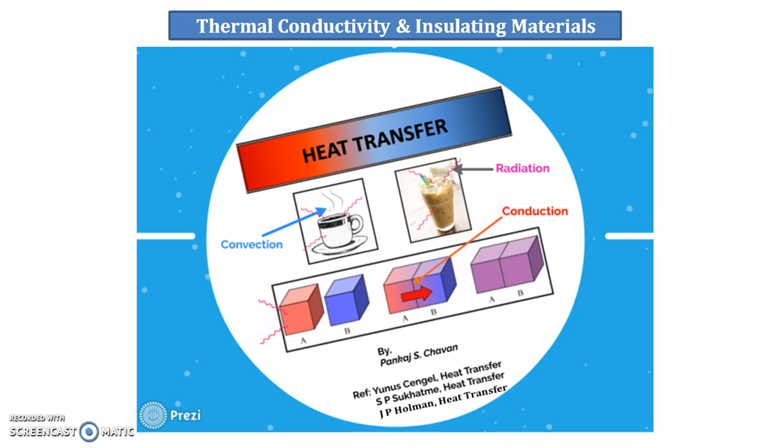Hello everyone. In this video, we will learn about different aspects of thermal conductivity and the different insulating materials.

In one of the previous videos, we discussed the different laws of heat transfer, and when we learned about the law of conduction, which is known as Fourier's law of heat conduction, we defined one property which is known as thermal conductivity. So thermal conductivity tells you about the ability of a material to transfer heat. It means that it tells you whether the material is able to transfer heat quickly or not.

And from Fourier's law of heat conduction, we came up with this equation, and the same equation can be rearranged so that we can get the value of thermal conductivity from it. On the basis of this definition or equation, experimental measurements can be made to determine the thermal conductivity of different materials.

We know that different materials store heat differently, and we have defined the property specific heat, denoted by Cp, as a measure of a material's ability to store thermal energy. For example, at room temperature, the value of Cp for water is 4.18 and for iron it is 0.45. It shows that water can store almost 10 times the energy of iron. As water has a high Cp value, it has a high capability to store thermal energy compared to iron. In the same way, the thermal conductivity K of water and iron can also be compared.

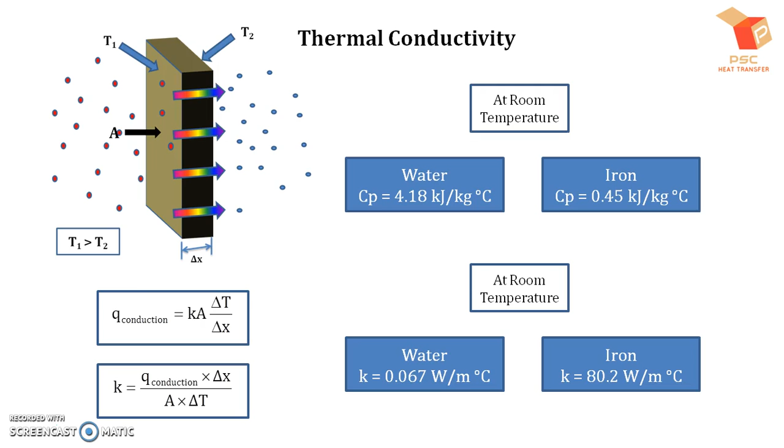Now this figure shows the varying ranges of thermal conductivity. For different substances like solids, liquids and gases, the thermal conductivity values and their ranges are provided. From this figure it is clear that this is the portion in which we have solids, and solids have higher thermal conductivity values, whereas gases have lower thermal conductivity values, and liquids have thermal conductivity values in between gases and solids.

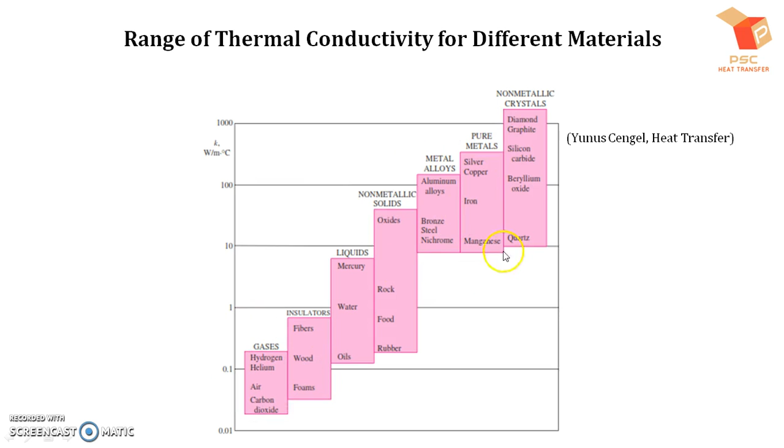Now we will explore the aspect of thermal conductivity related to solids, liquids and gases. So let us start with gases. We know that the molecules of gases are in continuous random motion, and as they move, they collide with one another and exchange energy with each other. So you can see here that the molecules are in continuous motion, and when they move, they strike each other so that the kinetic energy of one molecule is transferred to another molecule.

Now let us say I am heating this set of molecules here. What I have shown is the same set of molecules, the only difference is this is the set of molecules before heating and this is the set of molecules after heating. So when we heat this, the flame of the heat source has higher kinetic energy molecules.

These higher kinetic energy molecules strike the molecules of gas here and impart their kinetic energy to them, so these molecules' kinetic energy increases. This is because of collision, and this increase in kinetic energy is again transferred through the entire medium with their collisions.

Now here we can see that when we provide heat, the molecules move with higher average kinetic energies. It means that as the temperature of these molecules increases, the average kinetic energy increases, and the molecules move with higher kinetic energies, so that when they collide with each other, the transfer of kinetic energy will be more. Now let us say we have here two sets of molecules.

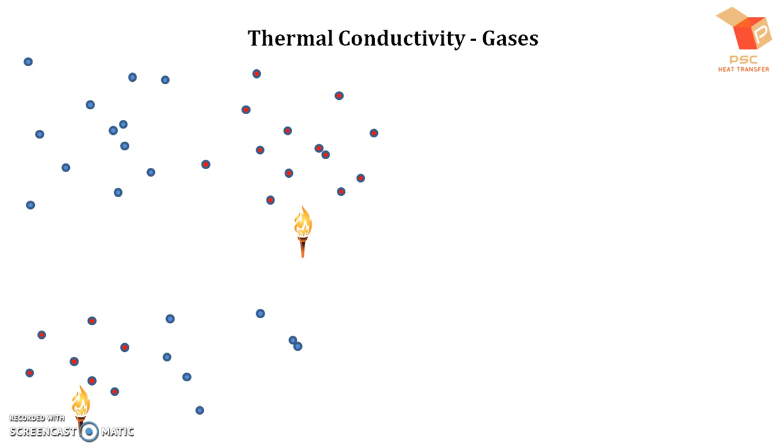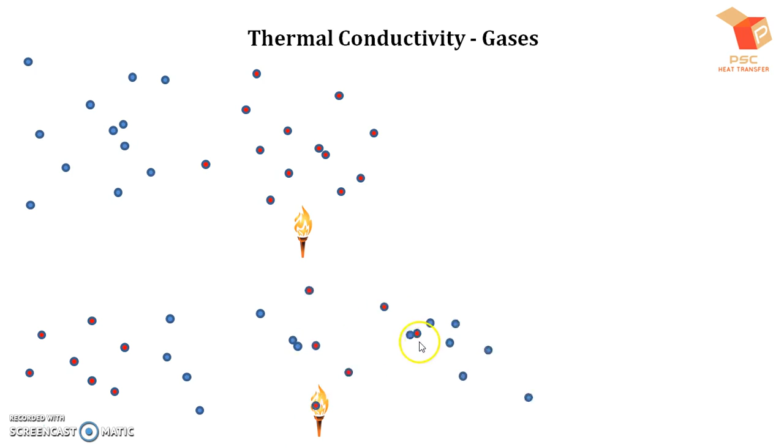Now in the same manner, I'm showing here the same sets, set 1 and set 2. Set 1 is now heated and its temperature increased, because of which the molecules are moving with higher kinetic energies, and hence the higher kinetic energy molecules will enter into the second set and transfer the energy.

From this we can conclude that as heat is given, the temperature will increase, and with increase in temperature, the average kinetic energies of the molecules will increase. As they have more kinetic energy, the molecules of higher kinetic energy will collide with the molecules of lower kinetic energy, and because of this collision, the amount of energy transferred will be higher, because the molecule from the higher temperature region now has higher kinetic energy.

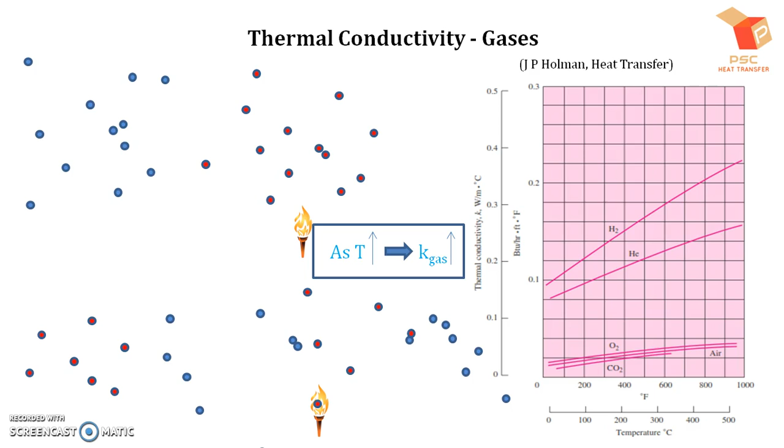And the same thing is shown here in the graph. Here we have different gases like hydrogen, helium, oxygen, carbon dioxide, air, and all the gases show the same behavior. On the y-axis we have thermal conductivity. As temperature is increased, the thermal conductivity is continuously increasing. So we can conclude that as temperature increases, thermal conductivity of gases also increases, because as temperature increases, the collisions increase, and the heat gets transferred quickly.

Now let us move on to thermal conductivity of liquids. The physical mechanism of thermal energy conduction in liquids is the same as we have studied in gases. In liquids as well as gases, energy is transferred due to collision of molecules. But the situation in liquids is more complex compared to gases, because the molecules are more closely spaced. Here you can see the molecules of liquids are closely spaced, whereas the molecules of gases are far apart, because in gases there are no intermolecular forces of attraction, but in liquids there are.

Because of these intermolecular forces, there is a strong influence on the energy exchange process. As the temperature increases, it is expected that the collisions will increase, but these intermolecular forces of attraction influence their motion, and so the energy exchange process is affected. In most liquids, we would expect that as temperature increases, collisions increase, so thermal conductivity should also increase. But it is observed that as temperature increases, the thermal conductivity of most liquids drops.

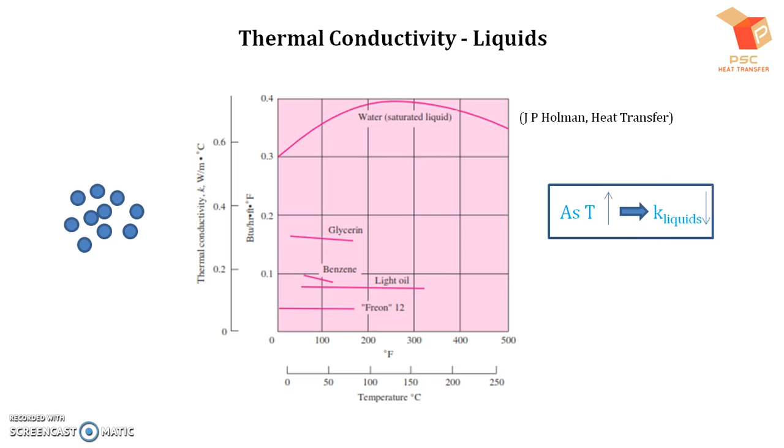We can see this in a graph. In this graph it is clear that as the temperature is increased, the thermal conductivity of glycerine, light oil, benzene, all these liquids is decreasing. But there is one exception, and that exception is water. In the case of water, initially the thermal conductivity increases and then it decreases. The dependence of thermal conductivity on temperature in liquids is very complex, but in most cases we can say that as the temperature increases, the thermal conductivity of liquids will decrease.

Now let us move towards solids. We know that in solids, conduction heat transfer happens through two different mechanisms. The first one is lattice vibrations and the second one is motion of free electrons. When we are heating one set of molecules, they will try to move out, but because of the bonds in between, the molecules are not allowed to move out, so they will start vibrating.

Its vibrations will increase, and these vibrations will get transported throughout the substance, and this is the way in which conduction heat transfer takes place. In this particular part, when you are heating the first set of molecules, they will try to move out, but the bondings will not let these molecules move out. These molecules will vibrate violently, and these vibrations will get transferred from the first set to the second, and from the second set to the rest of the molecules, and this is known as lattice

vibrations. The second way is known as motion of free electrons. When you are giving energy here, this electron will get energized, and since it does not have any restriction, it can easily move from this part. Because of the energy given, it will get excited and move throughout the body, because of which we have higher heat conduction in this particular case.

In the case of metals we have free electrons, but in the case of non-metals there are no free electrons present. So in the case of metals, lattice vibrations along with motion of free electrons is the mechanism of conduction heat transfer, whereas in the case of non-metals, it is through lattice vibrations.

Now let us go through the graph for solids, and we can observe that copper is a metal, carbon steel is also a metal, and all the metals are showing one thing: as the temperature increases, the thermal conductivity of metals is decreasing. Why? Let us say the temperature level is increased here.

What will happen? These molecules will vibrate more, so their amplitude of vibrations is very large, and when the electron is trying to get transported throughout the body, these vibrations restrict the motion of free electrons. So in the case of metals, as you increase the temperature, the vibrations will increase and restrict the motion of these electrons, so the thermal conductivity will decrease. From this we can conclude that as temperature increases, the thermal conductivity of metals will decrease.

Now in the case of non-metals, what happens? There are no free electrons, so as more energy is given, they will vibrate more. More vibrations means the heat will get transferred more easily and more quickly, and hence as the temperature increases, the thermal conductivity of non-metals will also increase.

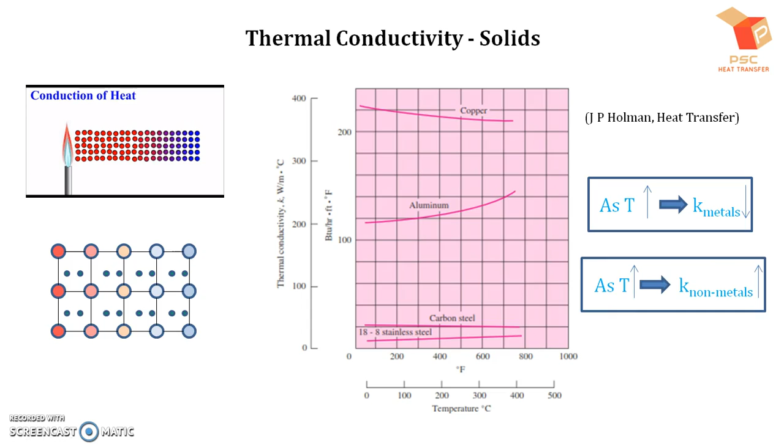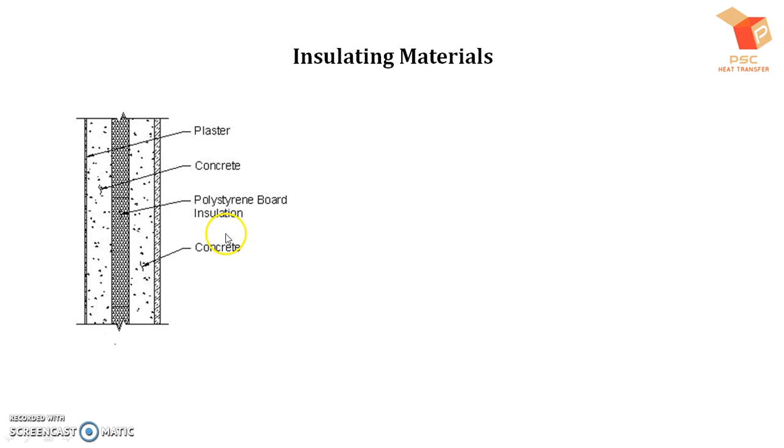Now moving towards the different insulating materials. Here we can see one example in which we have a brick wall structure, and at the center of it we have a material known as polystyrene board insulation. This material is known as an insulating material. Let us say the left face and right face temperatures of this structure are T1 and T2, and T1 is greater than T2, so heat transfer will be from left to right.

As the heat is getting transferred from left to right, it reaches this particular part, which is known as insulation. Insulations have a porous structure; they are made up of fibers and are porous in nature, meaning there are air voids or air gaps present. Now what happens when the heat enters this particular part? We have some solid material, and we have some air gaps also.

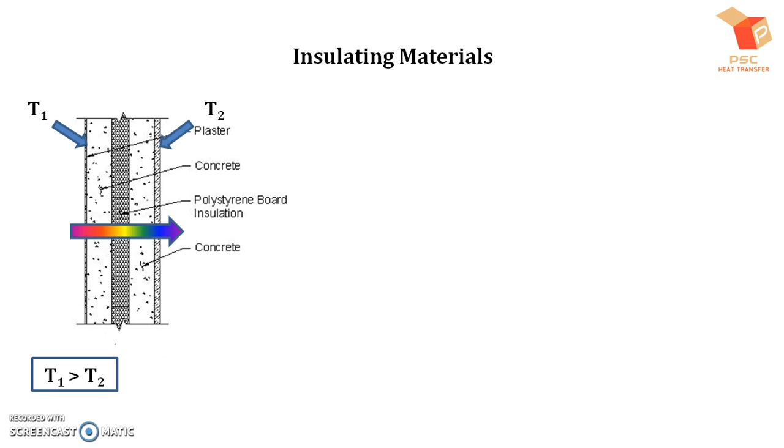When heat tries to pass through the air gap, we know that gases have the smallest thermal conductivity, and hence the restriction provided by gases to the transportation of heat will be very high. We have air gaps, but we also have some solid structure. Through that solid structure heat will get transported, but because of the air gaps the restriction will be very high, and this is the reason these materials restrict the heat flow, and such materials are known as insulating materials.

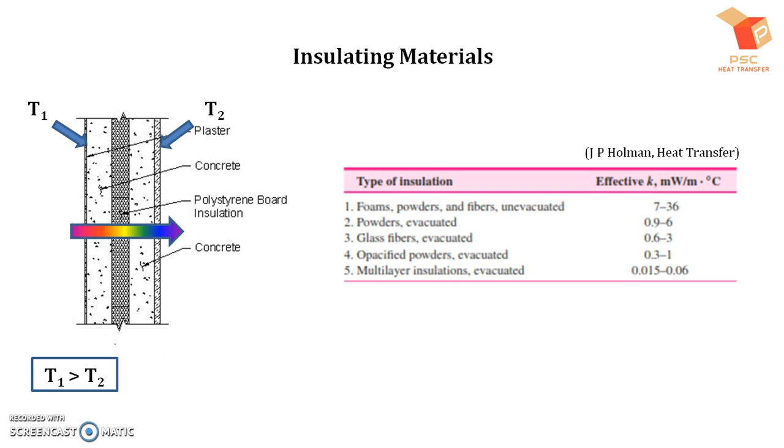Now the table here shows the different insulations and insulating materials and their respective thermal conductivity values. You can see that the thermal conductivity values vary from 0.015 to 36. So we can get very small thermal conductivity values with the use of insulations, and we can restrict the heat flow with such insulating materials.